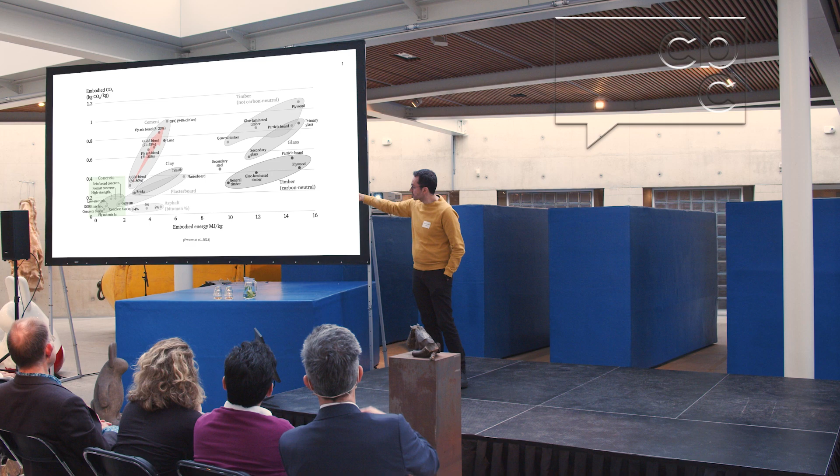And another thing that you can see in this plot is that the more cement you put, the worse it gets. So concrete, unreinforced concrete is down there, stone is even lower than that, and so on. So if we can achieve structures that use less concrete, but also lower cement concrete, then we actually have a very good material.

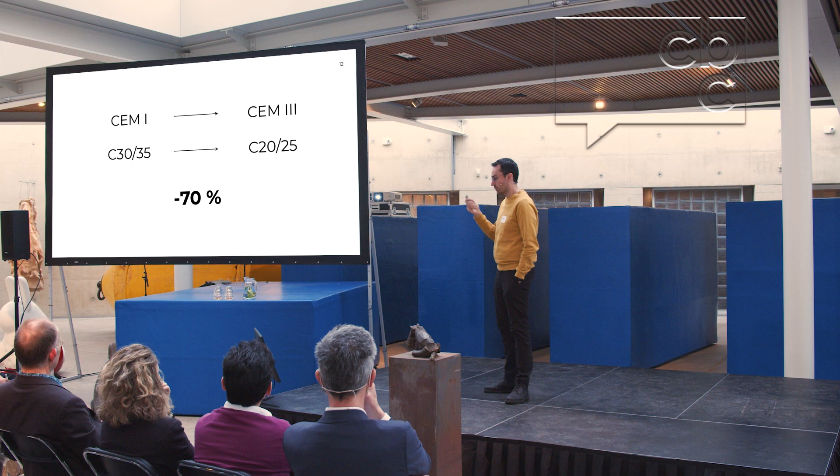So this is what you can do already now without doing any of our super fancy research topology optimization things. It should be almost illegal to use CEM I. You should go from CEM I to CEM III, or whatever the industry is providing us now, and then try to lower your cement content. So already with that, you can do 70% reduction of CO2 emissions, just that.

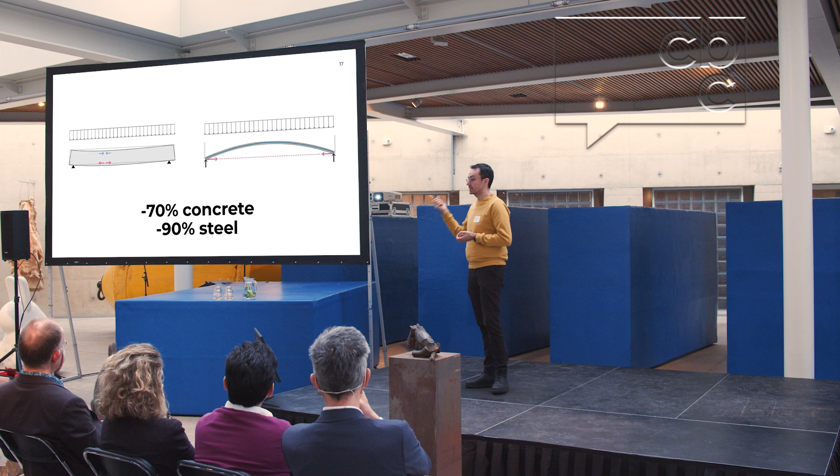So just putting the material where it wants to be, as Joris was saying before, just following the natural distribution of material, you can go with 70% less concrete and 90% less steel, because you still need the steel under to take the tension tie.

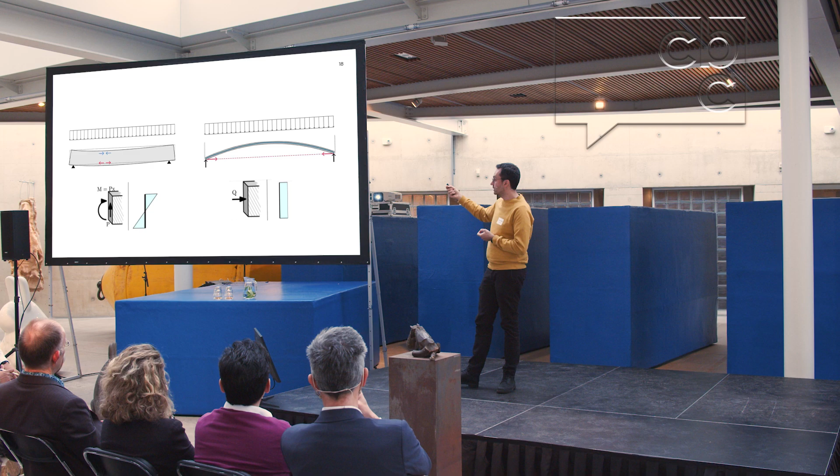And the other thing that you can do is distribute stresses in a much more natural way. In your beam, you have to design your concrete to reach the capacity of the most compressed or tensioned fibers. But if you distribute your material as it wants to be, and if you can center the thrust line of your loads, then you can have a uniformly distributed stress, so you can reduce the amount of cement, basically. You can go so low that this is possible.

And then we can say that these structures are not prone to corrosion because there is no reinforcement, they can last longer, so let's say 2. So already now, you can produce just 4.5% of the CO2 emissions that you're producing right now, with this very easy calculation. Of course, it's very easy to do in small applications, and that's probably the question that was at the end of the discussion.

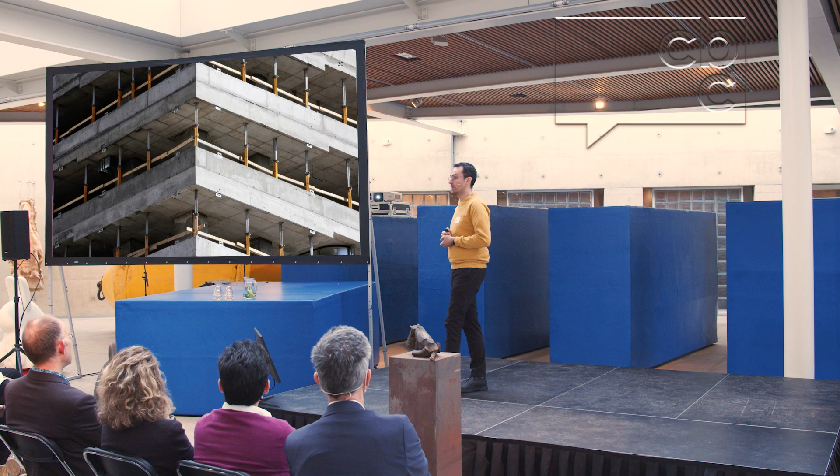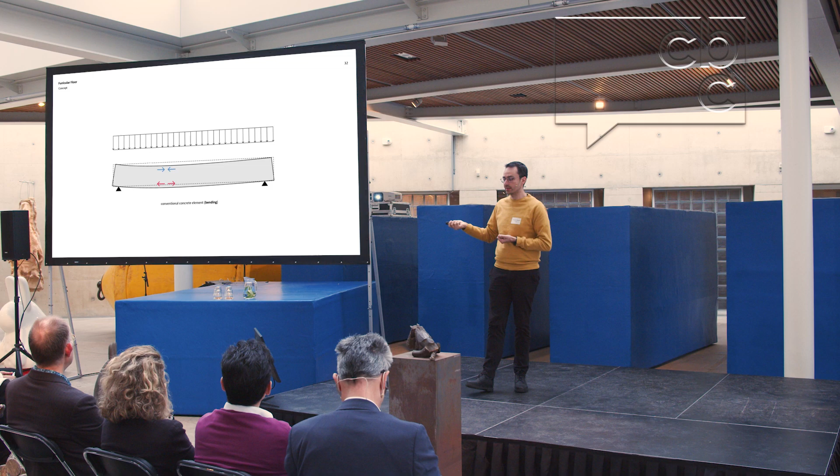There are many different structural slabs in the world that you can use, but they all work in bending. And because they work in bending, they use material inefficiently, and they all need reinforcement, which means that they waste material, they need high-strength material, reduced lifespan because there could be corrosion, and it's very hard to take them apart. But you can start from this, and you can sustain exactly the same load just by placing the material where it wants to be.

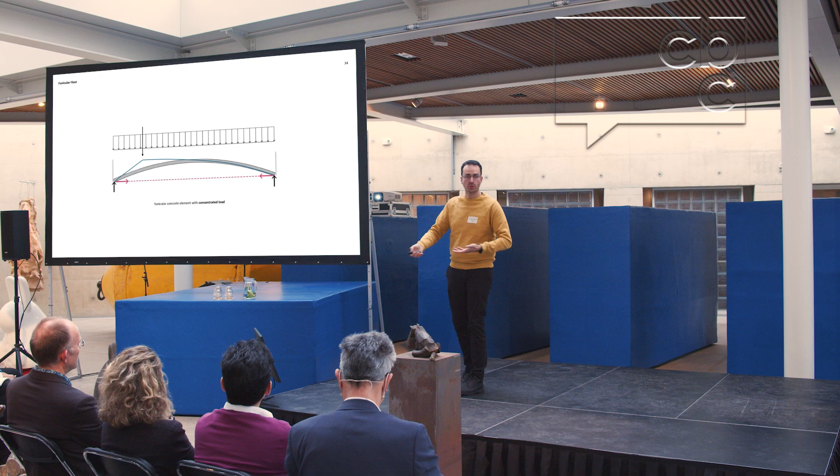Of course, what I didn't say before is that load is not stable. It's not always the same. In the case of a bridge, maybe the self-load and the superimposed dead load are so much higher than actual live loads that you don't have to take care of it. But in the common slabs, you walking around, this is an external load that needs to be taken care of. And this is why you need to increase a little bit the material.

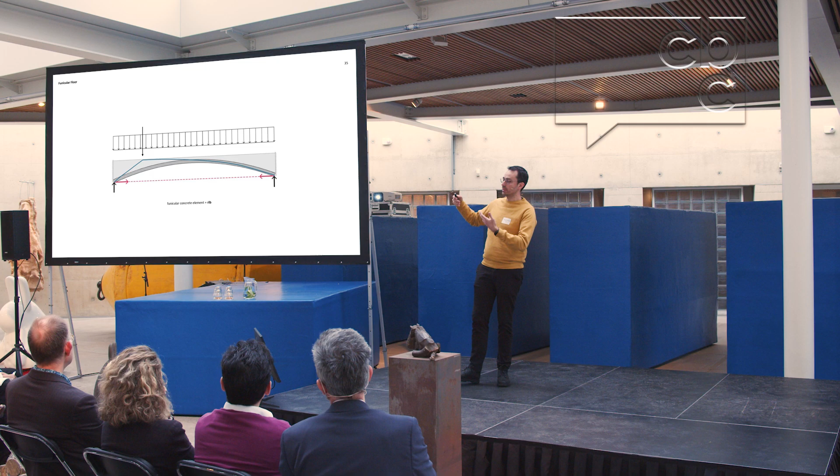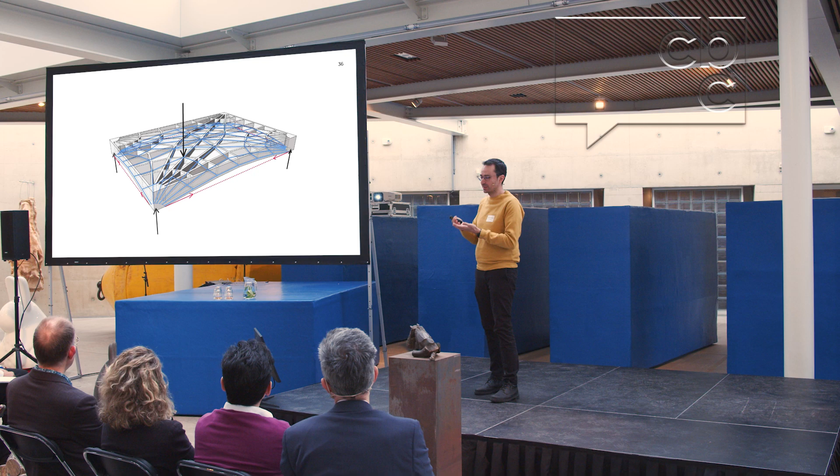You have to place the light gray part on the structure. You do this in a little bit more complex way, but the principle is exactly the same, and then you have what we call a rib stiffened funicular shell, which is actually a funicular floor. Because of the funicular action, you have a compression-dominated element, no reinforcement, so less material, low strength material, because stress is uniformly distributed, increased lifespan, and easier to recycle, because the materials are completely separated. You have only compression and only tension.

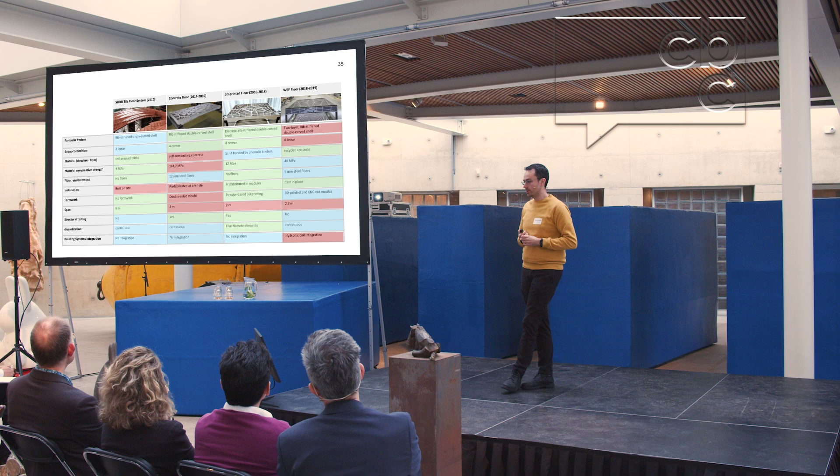Now, we did this, and Diederik showed some examples of it. We developed this in 10 years, but we did all the tests we had to do. We did also the tests that we didn't have to do. We loaded it with a bunch of nerds to show the world that it was safe. And in the middle, Matthias, who's actually the father of this invention. Then they gave us the opportunity to test it in a real building, the same Diederik was showing before. You saw the roof before, but inside there are actually 2 real scale floors.

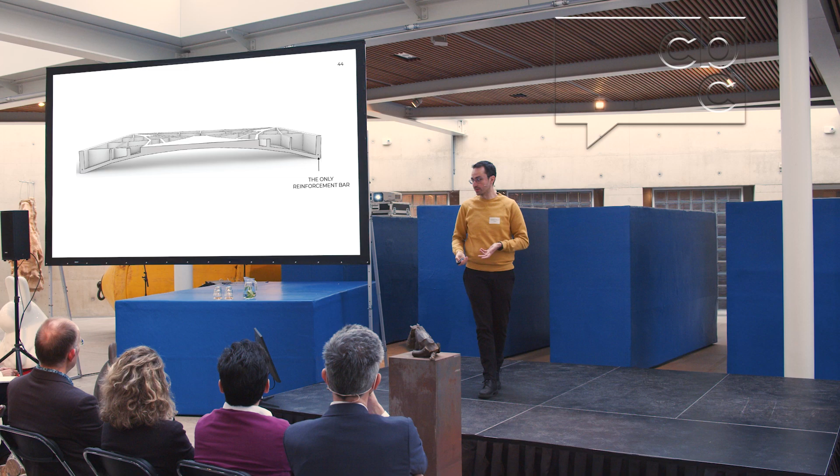This is the geometry of it. You can see an evolution of the shape. There is a topology optimization applied, and so on. But the real power of it is still in the vaulted geometry. And one thing I want to point out, this is the only reinforcement bar in the entire floor. It's a completely unreinforced concrete structure. So if you go back and see what we are doing now, you can see what's the change here. And this is the final product.

This is a real building used right now by a robotic fabrication research group in EMPA. This is 50% less concrete, not the 70%, because it was the first application and I was scared of killing someone. 80% less steel and 70% less carbon emission. The problem with this application is that it was a one-off. We had to build it in one location, and the construction was actually quite complicated.

You can see all the layers that you need. This is the bottom formwork. It's PLD plates, and this is a detail of the reinforcement, the 2 bars that I showed you before. Then you have to put something on top to create the ribs. We were also collaborating with a building system research group, so they wanted to have a pipe for heating and cooling of the room inside, so you put it on top.

You have this nice formwork, and then you pour, and then you have everything ready. Okay, so you understand that this process is not applicable to what we have to actually do, so we had to move forward. And so that's why we invented the next generation of funicular floor, what we call the Rippmann Floor System. It's a prefabricated, discretized structural element, completely unreinforced as the other one, which can be produced in a controlled environment, in a factory, delivered on site, and then assembled without any glue, without any particular joint.

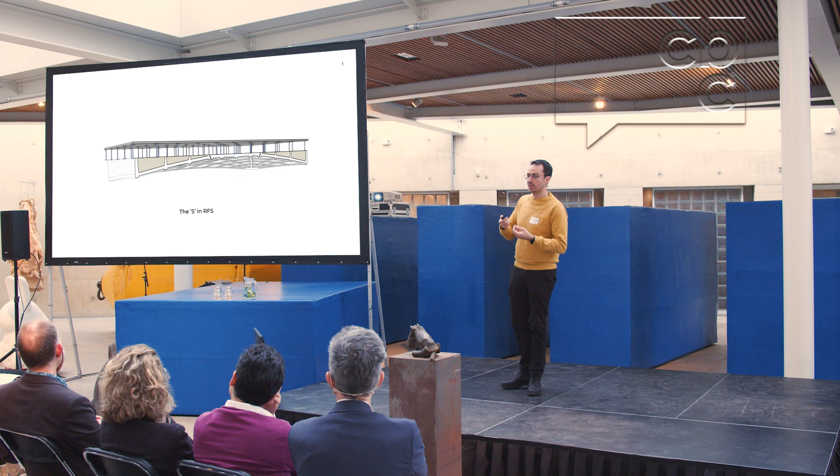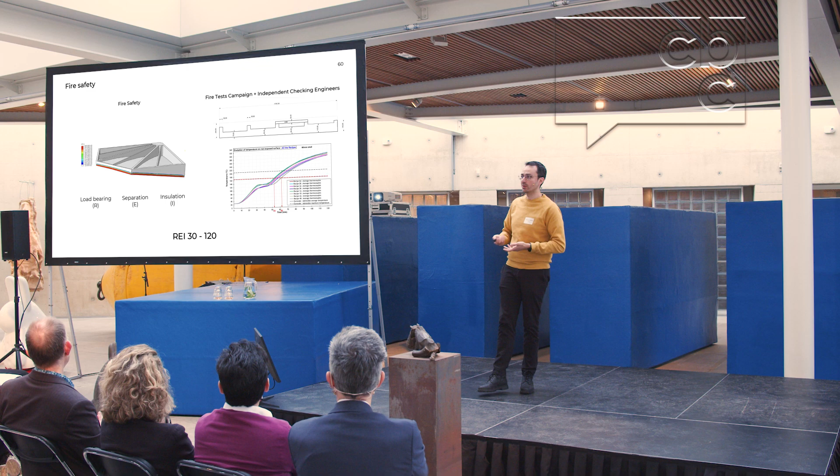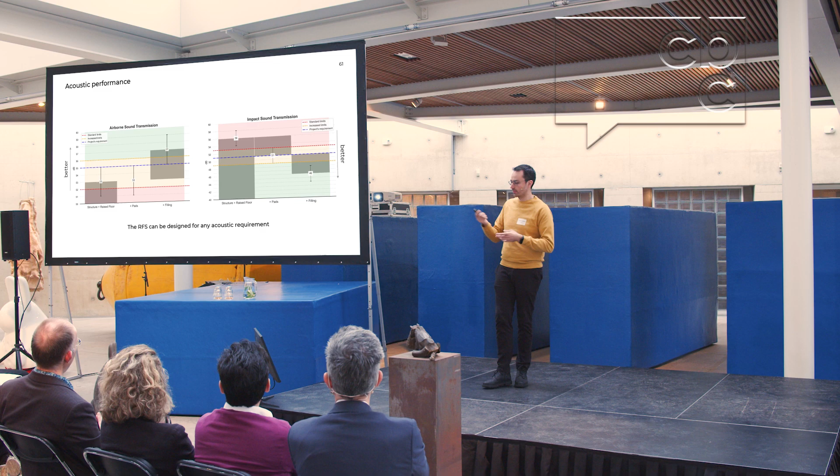But the Rippmann Floor System is a system. It's not just one solution. It can be tailored for any sort of application, from schools to car parks to office buildings, and for different types of fire safety. We did all the tests, because this was the thing that was missing during the research. Now we did all the tests in the fire chamber. Acoustic performance, we had to have real scale demonstrators and tested for airborne and impact sound transmission.

And that was our first real application. And because we wanted to make our life more complicated, it was a 10.5 by 10.5 floor, so quite big, in Belgium. And this should be a video of the first. This is a mock-up that we had to build, because the client, of course, didn't trust us. Good for them. And so these are the pieces that come together. That's me assembling it, so you don't need really high complicated, super fancy construction workers. And this is the final floor.

For this building, we demonstrated that we could save 7,500 cubic meters of concrete, which doesn't mean anything, but then you say that it's 1,200 concrete trucks that don't have to go on site. 20 kilometers of rebars, Φ12 per floor. Again, it doesn't mean much, but then you demonstrate that it's from Zurich to Belgium, where this thing was, and so on and so on.

So we discovered that basically we had a business opportunity. That's why we founded the company, VAULTED. And the core of the company, the vision of the company, is that we can right now make the construction industry sustainable, not more sustainable, just sustainable. And these are the things that you have to do. It's a very easy process. We saw it before also in other presentations.

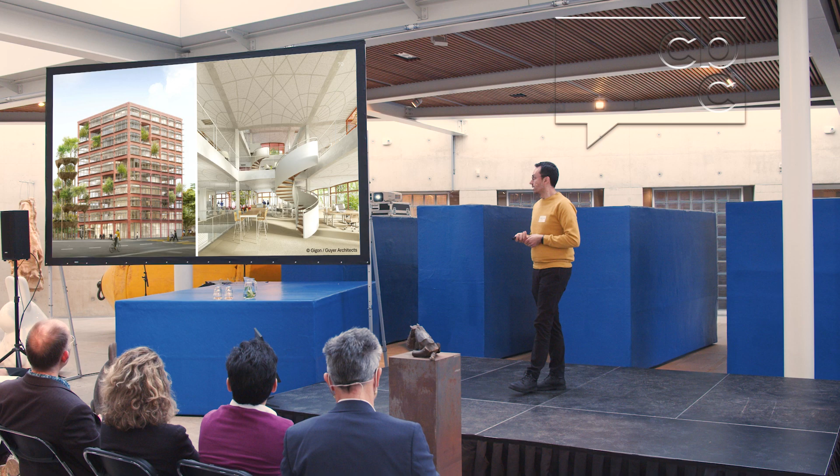And we were convincing, and one of the professors in ETH, he's a designer of the tallest tower in Switzerland, came to us and said, okay, you guys want to do a competition with us? So we did a competition for this building, and we won. This is the Crea Tower in Zug. And you can see on the right the application of the floor. This is 180 floors, so 6,800 square meters.

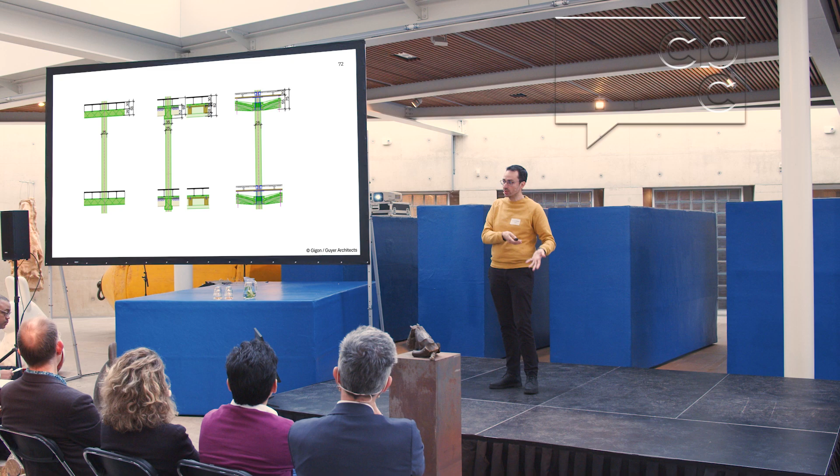So we had to basically first beat all the competitors. The client hired another engineer to check all the other solutions and compare to ours. And they demonstrated that our solution was cost neutral. I heard before, because my Dutch is not that good, about cost and how this thing can be related in real buildings. This is a demonstration that you can do something innovative without adding any cost to the building, because you use 70% less mass, so your foundations are also much cheaper. Your beams are cheaper, your columns are cheaper, and so on.

We had to scale up production, so we have a production factory. We had to find a way to deliver this thing properly, 180 of them. It's not easy. And then we assembled another mock-up. This was a one-to-one mock-up, 6.5 by 6.5 meters. And you can see, again, it's the same principle. You have the blocks. They are completely separated, dry jointed. You just put them together. Now, again, it's us doing it. A smarter, faster person can do it much faster, but it takes about 1.5 hours for each bay.

This is the final floor. This is the underneath. You can see this is a detail for the room acoustics, because we also integrate the room acoustic in the floor. This is with the panels, and I'm pretty much done. This is what we are doing in the future. So we want to bring to you designers something to design your floors for yourself, and then we will move from this bespoke kind of design to a line that you can include in the structures directly. And that's concluded.